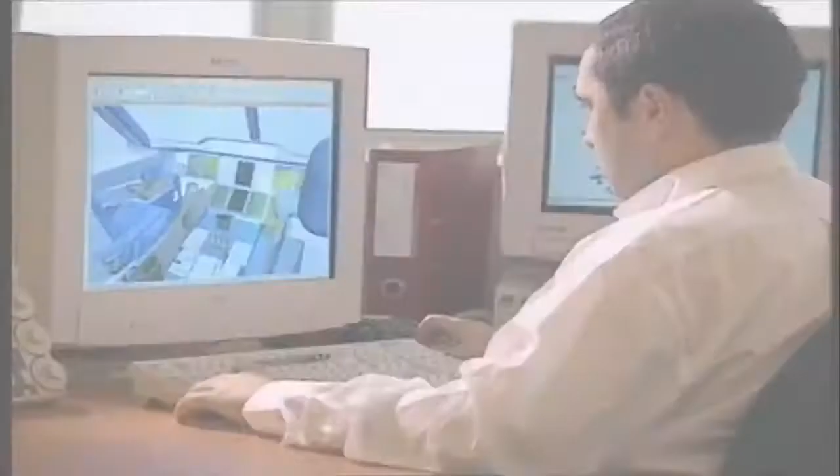It's a mega plane, bigger and heavier than any other passenger plane in the sky. It will hold more people than any commercial jet flying. Designers have spent billions. Now is the moment of truth. Will the world's biggest passenger airliner survive its maiden flight?

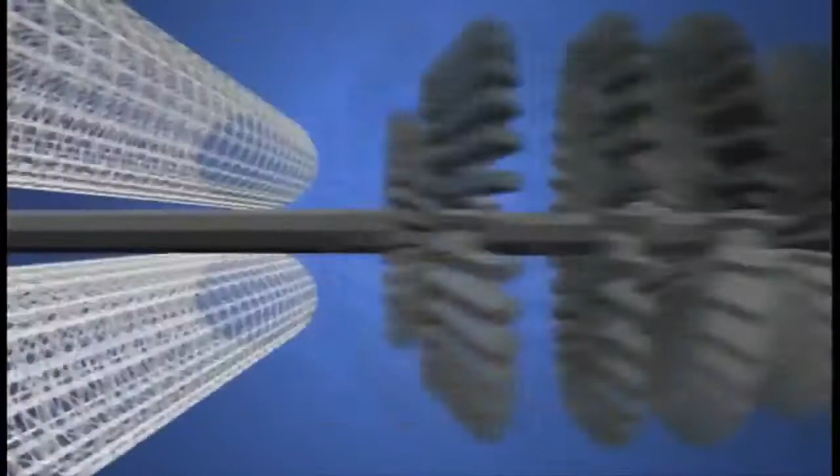An early spring morning, clear skies and a light breeze over southwestern France. Crowding the fields that flank Toulouse International Airport, 40,000 spectators, backpackers, campers and journalists from around the world. All vying for the perfect spot to watch the maiden flight of the Airbus A380, the largest passenger plane ever built.

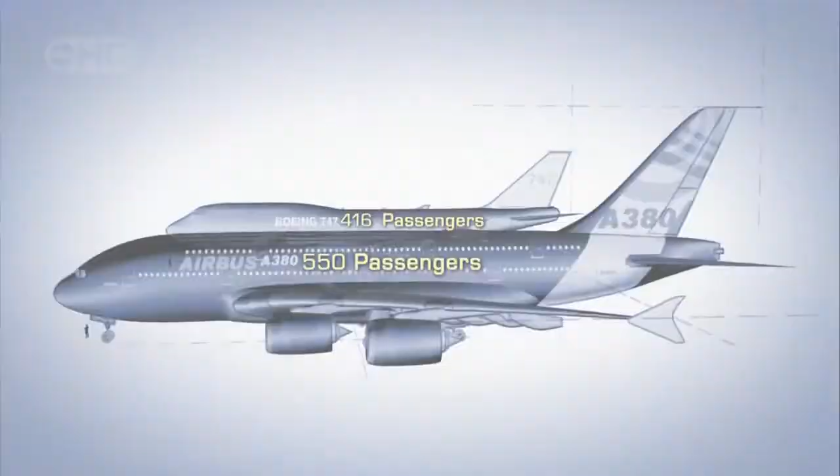It's 73 meters long, 7 stories tall at the tail, almost 80 meters from wingtip to wingtip. Heavier, longer and taller than a 747, with 2 full levels of seating, enough to hold over 550 passengers. Getting this monster off the drawing board required new, super lightweight materials, 4 powerful new mega-sized engines, massive new factories across Europe, and a computerized flight control system more sophisticated than any other in commercial aviation.

This moment is the biggest gamble that the company has ever taken. A $12 billion investment, the company's entire future, and the lives of future passengers all ride on the success of this historic test flight. Alongside the runway, a hush settles over the crowd as the megaplane comes into view. Gradually, it gathers speed, accelerating to reach its takeoff velocity of 269 kilometers per hour.

Then, as it nears the end of the runway, the moment of truth. The massive nose tilts skyward. A sliver of daylight appears beneath the rear wheels, and the Airbus A380 takes to the sky for the very first time. The engineers and technicians in the crowd breathe a collective sigh of relief. Their baby is flying.

The question now is, does anyone want a plane this big? Will the unprecedented size prove a boon or a boondoggle? Is this super jumbo the future of commercial aviation? Or the biggest white elephant since Howard Hughes built the Spruce Goose? It all depends on whether Airbus can convince airlines that travelers will want to trust their fates to this flying cruise ship.

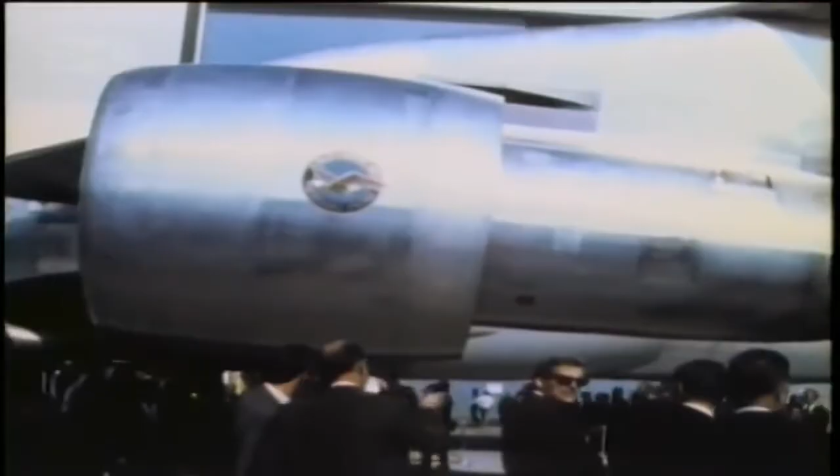1969 was a year of technology firsts. That year saw the arrival of 2 exotic new airliners. Boeing rolled out the 747, the first double-decker passenger plane, larger and heavier than any other. Powered by 4 Pratt & Whitney JT9D engines, providing a total of 186,000 pounds of thrust, the plane had enough oomph to carry more than 400 passengers and their baggage, more than double the capacity of the 707. The plane wasn't an immediate hit. But eventually, it took off.

The Concorde is here. That same year, Aerospatiale and British Aircraft Corporation, the precursor to Airbus, introduced the Concorde. While Boeing was bulking up, Europeans were getting small, but very fast. The Concorde traded capacity for speed. The plane carried only 128 passengers, but it could cruise at twice the speed of sound, cutting the trip from New York to London from almost 8 hours to just under 3.5. Both the 747 and the Concorde came to be the epitome of luxury in air travel.

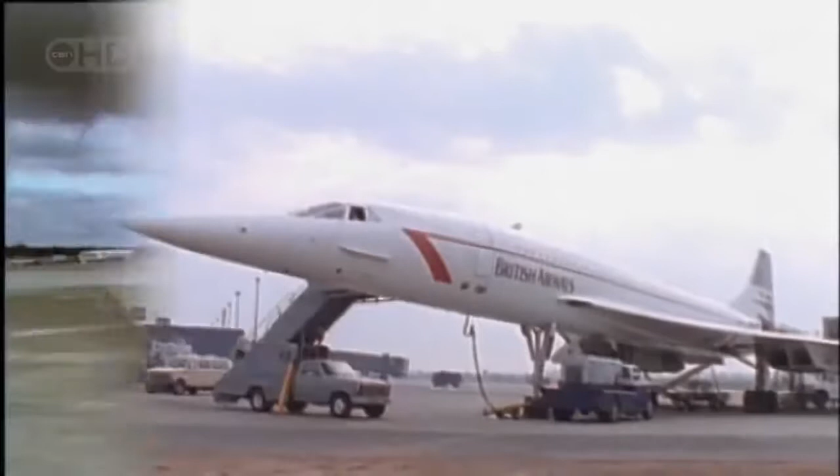These two differing visions came to symbolize a fierce rivalry between American and European aerospace giants. A rivalry that's only intensified with time, even as the business of air travel has changed dramatically. The Concorde, after years of financial difficulties and a devastating crash in Paris, has been grounded. And the 747 is now an aging workhorse, noted less for style and more for the sheer number of passengers it can pack between its wings. What changed to turn air travel from a luxury to the airborne bus ride that it is today?

Simple economics. In just a few short decades, the number of people traveling by air has tripled. Now, every day, hundreds of thousands of people pack into 70,000 flights, taking off and landing at more than 4,000 airports around the world. And those numbers are only going to get bigger, much bigger. Industry analysts predict that the number of air travelers could double again by the year 2020. That is, if anyone can figure out how to squeeze them into an already overcrowded system.

Both Boeing and Airbus saw the writing on the wall in the 1990s. But the companies each took a very different bead on the problem. Boeing believed that one of the biggest increases in air travel would be point-to-point flights. Get on near your home, get off near your destination. Boeing put its muscle behind the 787 Dreamliner, a highly efficient plane designed to carry an average of only 250 people.

The A380, though, is an altogether different order of beast. It's designed for hub-to-hub travel. Passengers will board a small plane near their home, then connect at a major airport to a larger plane, travel halfway around the world, and get off at their final destination. It's a strategy specifically designed to serve the most rapidly expanding long-haul routes in and out of Asia, and to cater to customers who appreciate a bit of pampering.

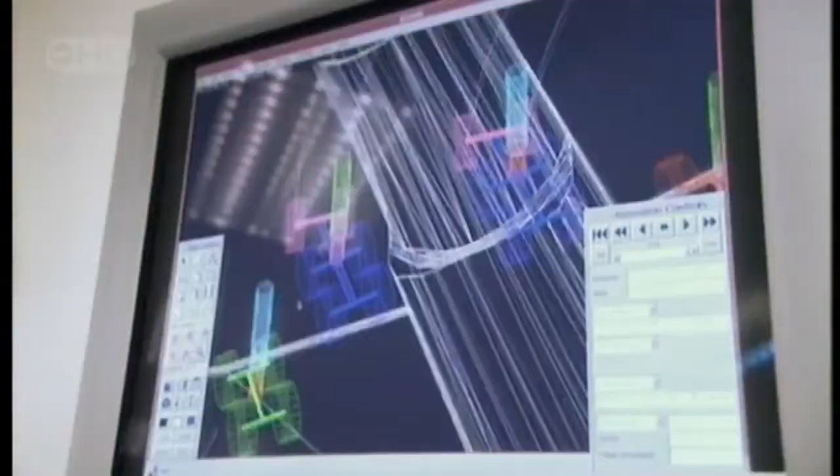The plane's sheer size, with 2 passenger decks, is large enough for both standard seating as well as more luxurious features, like a lounge, a high-end shop, 2 staircases, even a waterfall. It's a breathtaking dream. But no one knew if such a plane could be built. Some argued that such a craft would be far too heavy and expensive to be practical. But a tenacious and aptly named Airbus executive, Charles Champion, wouldn't take no for an answer.

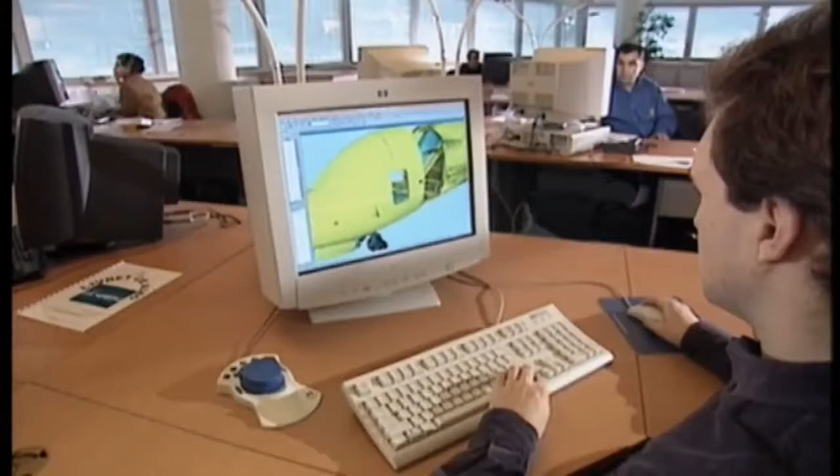He encouraged his design team to think outside the box. Yeah, well, there were lots of weird designs. Some looked at the double bubble. One of their first ideas, the double bubble, a double-wide fuselage. It looked promising, but computer analysis showed that it would be far too heavy and not sufficiently aerodynamic. So Champion sent his team back to the drawing board, and eventually they came up with this history-making concept.

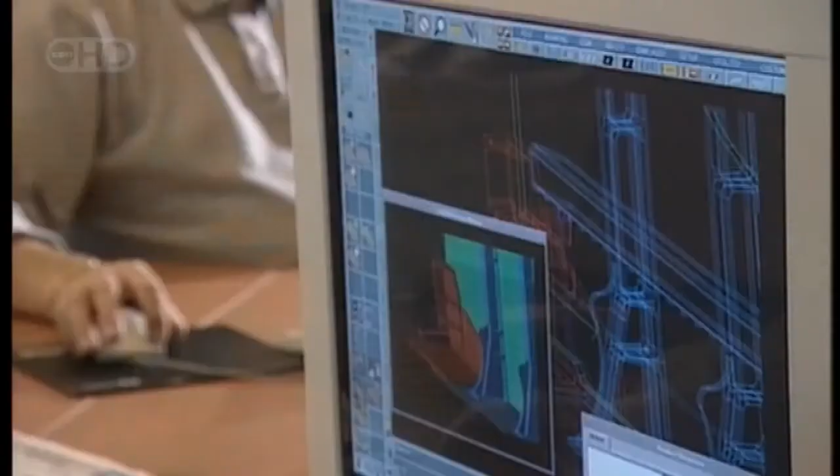A full-length, double-decker passenger cabin, with a 3rd deck below for cargo. Space-wise, it's the equivalent of 2 complete wide-body cabins, one on top of the other. The new plan called for an aircraft only 2.5 meters longer than Boeing's 747. It was 15 meters wider and 5 meters taller. But when they ran the design figures through the computer, they had a shock. The plane was far too heavy.

And we came up with horrid figures, saying, my God, this is the weight of the aircraft, doesn't work. So what we did immediately at the launch of the program, or 2-3 months afterwards, we launched a very strong challenge on the weight. The team set out to bring the base weight of the aircraft below 277 tons. That's only about 50% heavier than the 747. An ambitious goal for a plane designed to carry over 100 more passengers and their luggage halfway around the world. Unless Champion and his engineers could find the means to beat that target, the dream would die.

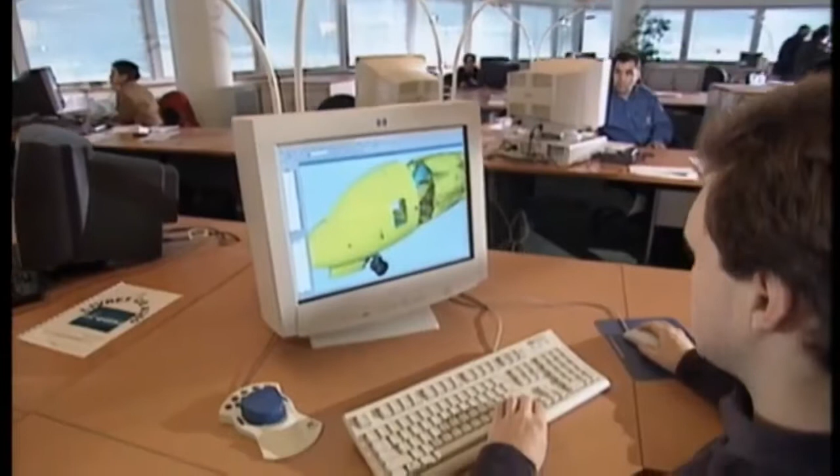Airbus engineers were faced with a design challenge that called for a lightweight plane carrying over 550 passengers at a lower cost per seat, not to mention quieter and less polluting than anything in the air. The design team knew they would have to rethink everything. They needed lighter materials, more powerful engines, larger wings, even bigger and smarter factories. Every component would have to be scaled up from supersize to mega size.

But even while the engineers were still scratching their heads over the details, the Airbus sales force was already hard at work, seducing customers with visions of the future. They created a full-sized interior mock-up that promised passengers in coach some relief from the grind of travel. With seats an inch wider than in other planes, and overhead bins 10% larger.

Each plane can also feature a new interior illumination scheme to eliminate the upsetting effect created when flight attendants suddenly switch on overhead lights. The kinder, gentler system in the A380 mimics the gradual transition from day to night and back to daytime again. These and other innovations make the plane distinctive, but it's the promise of opulent luxury that really turns heads. To help build excitement, computer programmers constructed a virtual showroom where airlines can bring to life their wildest design fantasies.

Ladies and gentlemen, this is your captain speaking. I'd like to welcome you on board this 3D tutorial for the A380 main deck door.

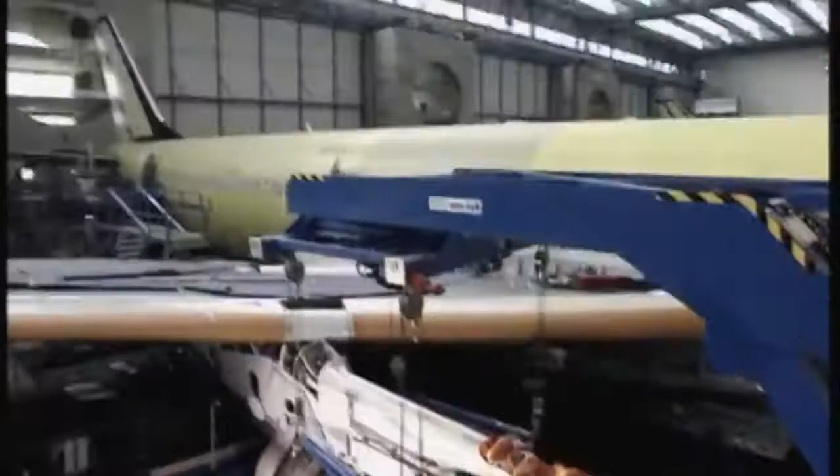Of course, no dream could take flight until engineers came up with a way to lift all that weight. In late 2000, builders finally settled on a design. For power, they would buy engines built by Rolls-Royce, capable of providing 30% more thrust than the engines used on the 747. Each massive power plant cost $15 million, as much as a ton of gold. Altogether, they account for almost 25% of the cost of the entire plane.

If there's one thing this aircraft needs, it's thrust that won't quit. Each engine provides up to 80,000 pounds of force. Running at top speed, this mega guzzler sucks down a litre of fuel every second. The A380 is designed for routine flights lasting 13 hours or more. That means when it's fully tanked for takeoff, the A380 carries a lot of fuel. 260,000 litres, 20% more than the load carried by the 747.

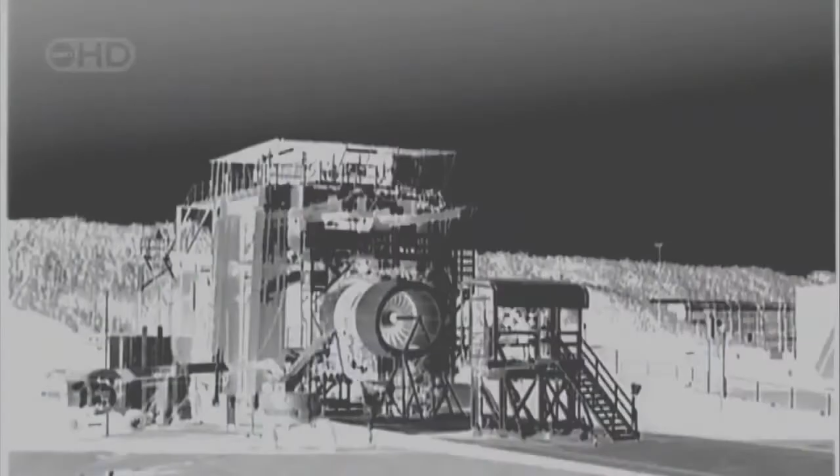Just imagine what would happen if anything threatened the integrity of one of those fuel tanks, like a catastrophic engine failure that sends shards of metal tearing through them. That's the nightmare that haunts engineers at Rolls-Royce, and they're about to destroy an engine to make sure it never occurs.

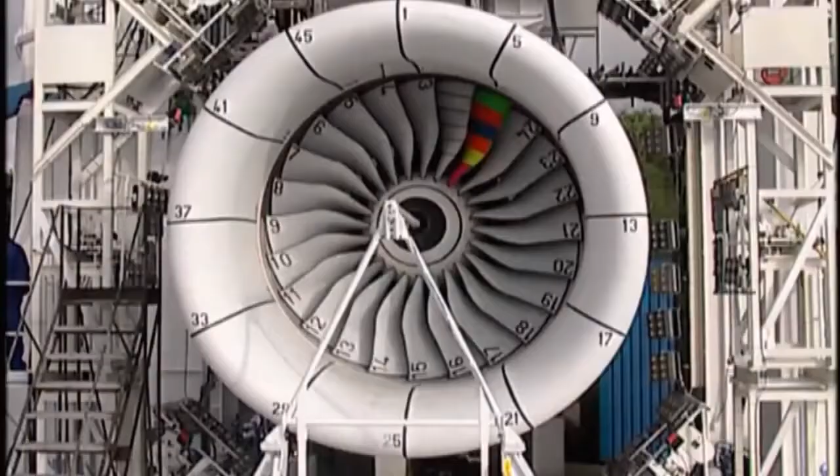These 24 titanium fan blades suck air into the maw of this A380 engine. Each blade is 1 meter in length and weighs 15 kilograms. Lightweight, but super strong. When the engine is roaring along at full throttle, the blades spin at almost 3,000 revolutions per minute. The centrifugal force at the tip of each blade is equivalent to the weight of a 110-ton locomotive. If one of these were to break off and escape into the engine, it could wreak unimaginable destruction to the plane.

That's why Rolls-Royce engineers are about to conduct an engine failure test. They're going to intentionally cause one of the fan blades to break off at full speed in order to prove that the engine enclosure can contain the damage without letting any metallic fragments escape. In the process, they will totally trash this $15 million engineering marvel, a small price to pay when the lives of over 550 people could be at stake.

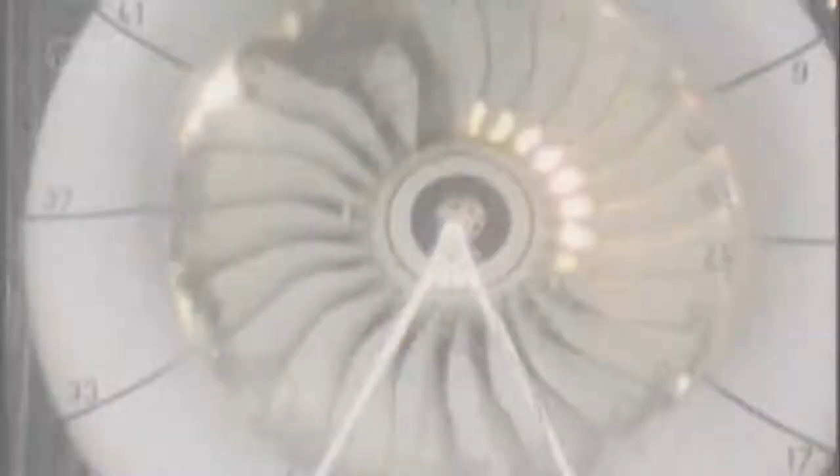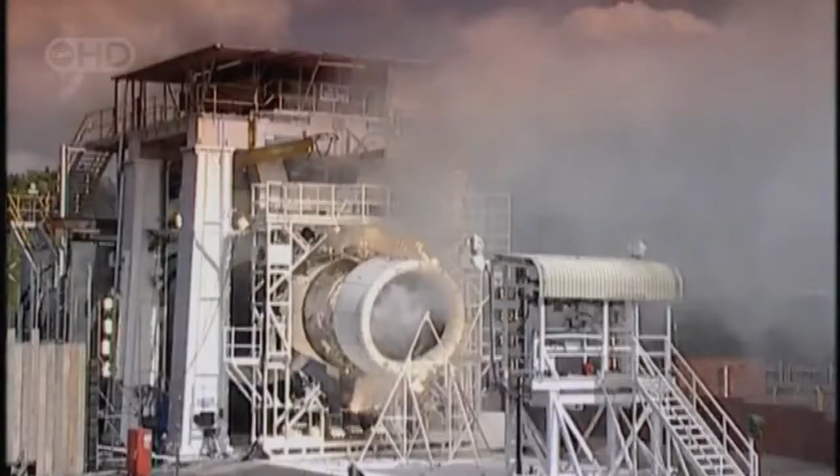A super slow-motion camera captures every moment in excruciating detail. The blades are striped to make visual measurement easier. When the fan is spinning at full speed, engineers send a signal to explosive bolts at the base of the multicolored test blade. Faster than even this camera can see, the knife-like piece of metal shears off and flies into the engine mechanism, wreaking havoc, but no fragments escape. The A380 engines are safe for flight, but there are many more pieces to the puzzle. Every other major component would have to be designed from the ground up.

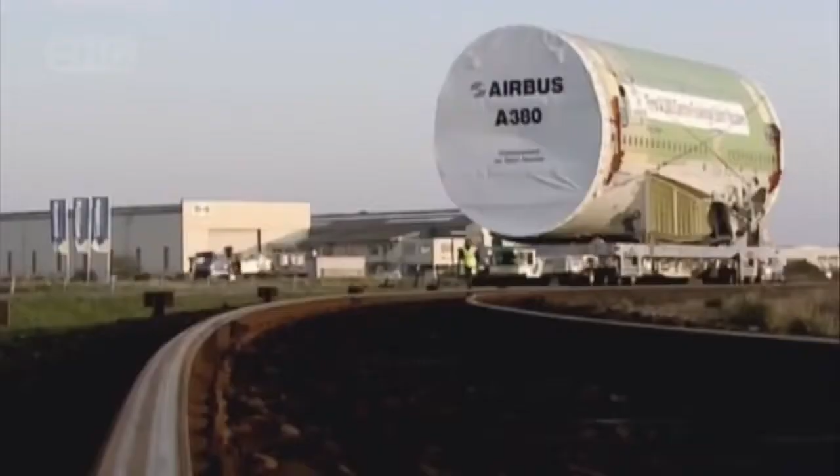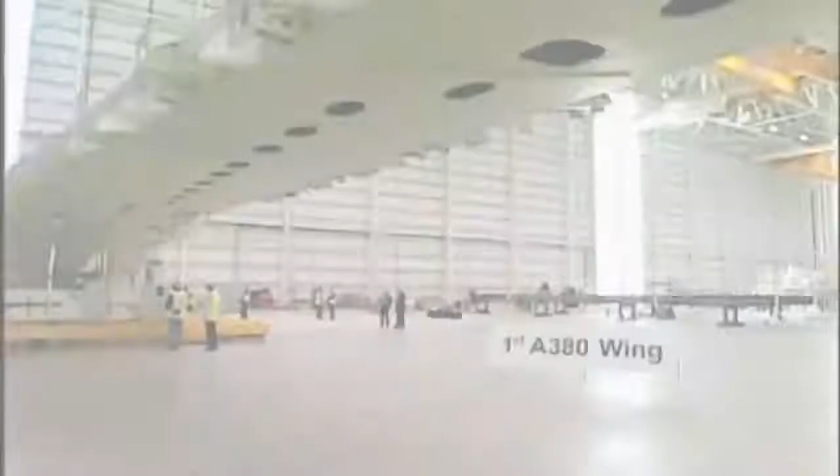Luckily, Airbus has already turned the world into a giant mega factory. With 1,500 suppliers and facilities used to build its existing planes, scattered over 30 countries, yet tightly linked by an advanced communication and transportation network. To assemble the hundreds of A380s the company hopes to sell in the coming decades, planners settled on 5 countries to build the major components. Wings in Wales, engines in England, the fuselage and vertical tail section in Germany, the horizontal tail section in Spain, and of course France, where all the pieces came together to assemble the finished plane.

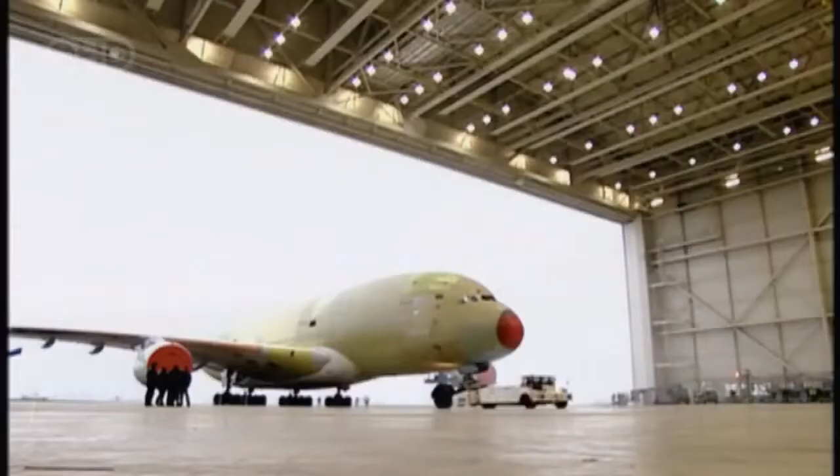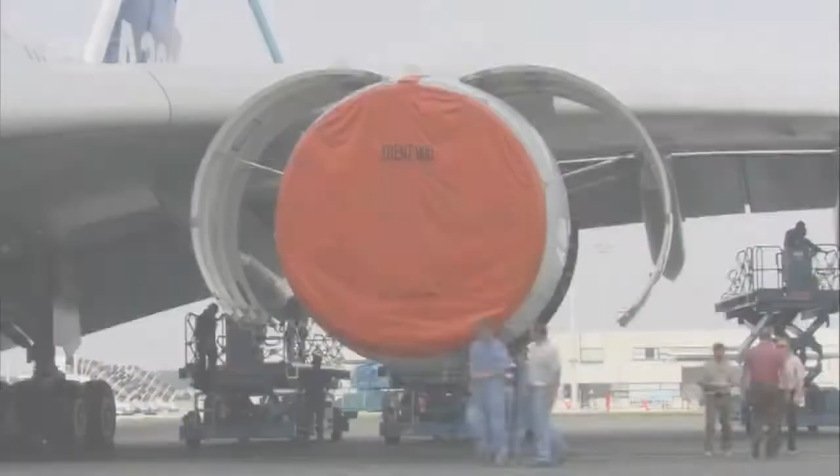The process begins in Wales, in 2 huge new wing factories, built to assemble the largest and most structurally complex commercial airplane wings ever designed. 32,000 components, shipped in from every continent except Antarctica. The wings on the A380 are true mechanical marvels. They provide flight control and enough lift to carry the fuselage, plus the 4 supercharged engines, each weighing nearly 6.5 tons. And with 260,000 liters of fuel loaded inside 10 interior locations, the wings are also flying fuel tanks. They're one of the most critical structural components in the entire aircraft.

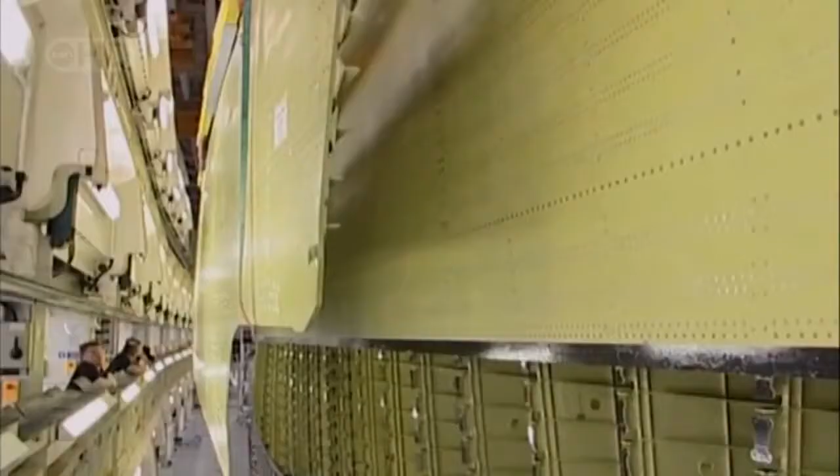The precision construction process begins with sheets of aluminium. Destined to be shaped into the 10 panels that cover each wing, each piece has its own shape and weight requirements. To whip one up, just follow 3 not-so-easy steps. Shave it, wrap it, then bake it.

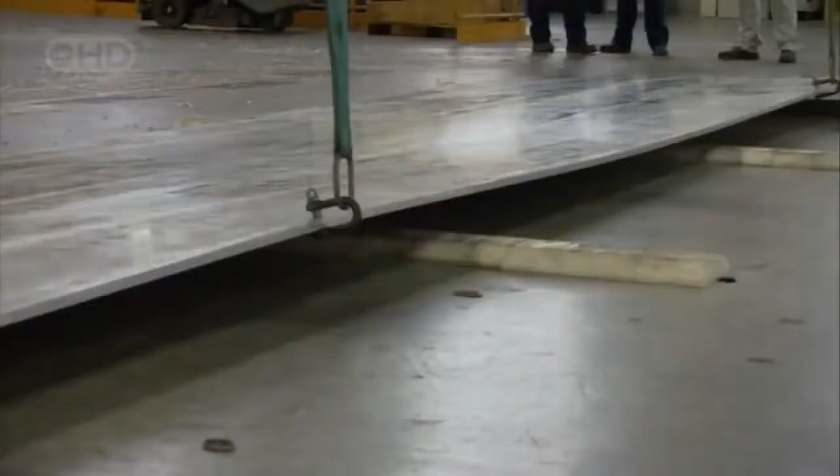This 34-meter-long slab of aluminium weighs in at 5 tons. Way too heavy for the wing panel it's destined to become. In its final form, it will weigh close to 1 ton. So off it goes, to get the aerospace version of a tummy tuck. Overhead cranes use 32 powerful suction nozzles to lift and transport each aluminium slab.

Tim Fernifer carries the burden of responsibility. Using a remote-controlled steering device, Tim guides the 5-ton piece of metal across the factory floor, but he can't do it alone. His team must watch the motion of the wing panel throughout the ride.

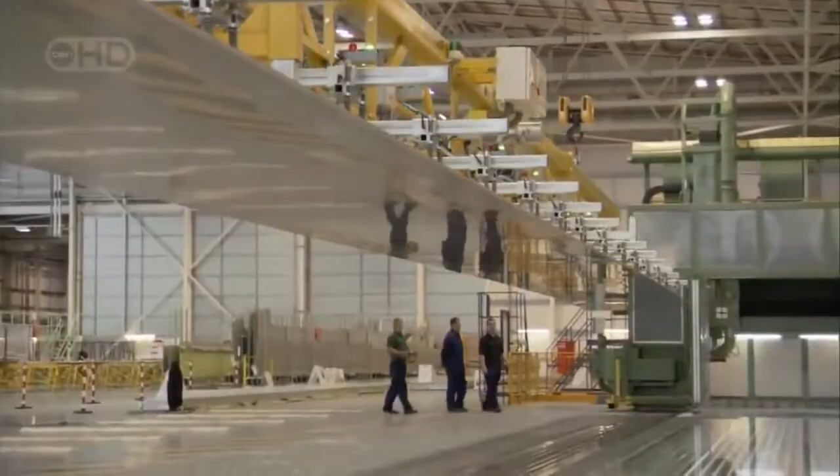You've got to be particularly careful when I'm handling it. But I can't see down the other end, so I need another pair of eyes down the other end. It's just health and safety issues. You have to watch, make sure everybody's out of the way when it's actually moving. It's a dicey ride across the factory floor before the huge sheet can settle safely into position.

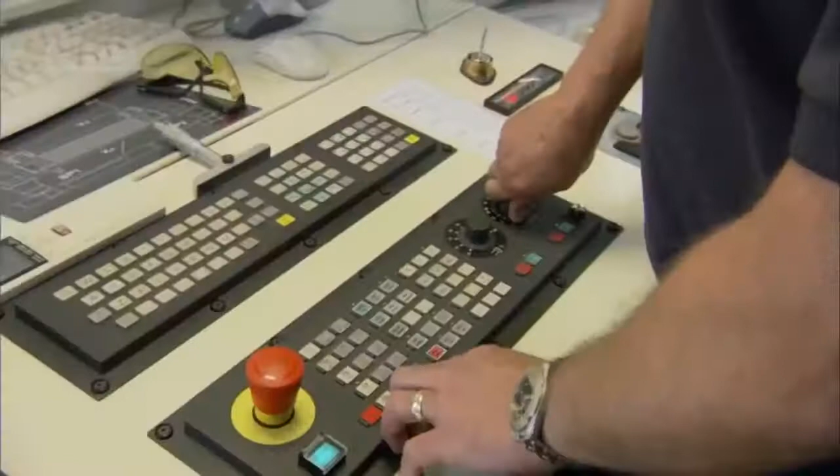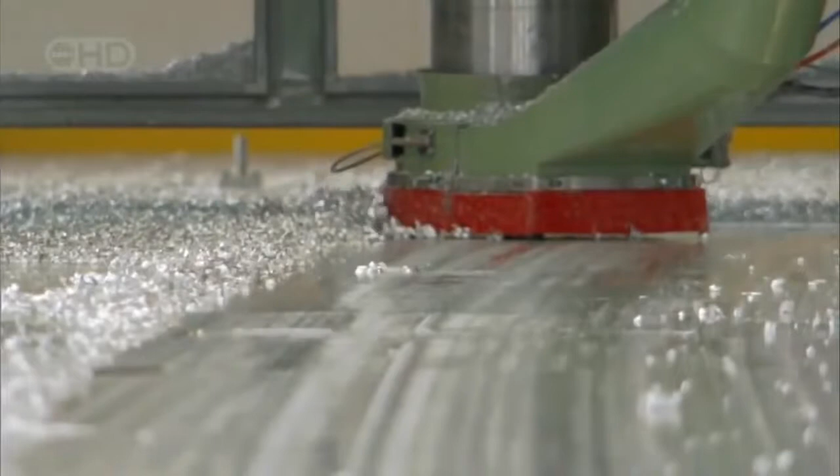A milling machine 40 meters long. Like an oversized cheese grater, the precision cutting head slowly cuts back and forth across the surface of the wing, painstakingly shaving the aluminium until the panel shape matches the 3D contour map stored in the machine's computer. The process takes up to 3 days. It eliminates 75% of the panel's weight while maintaining its strength.

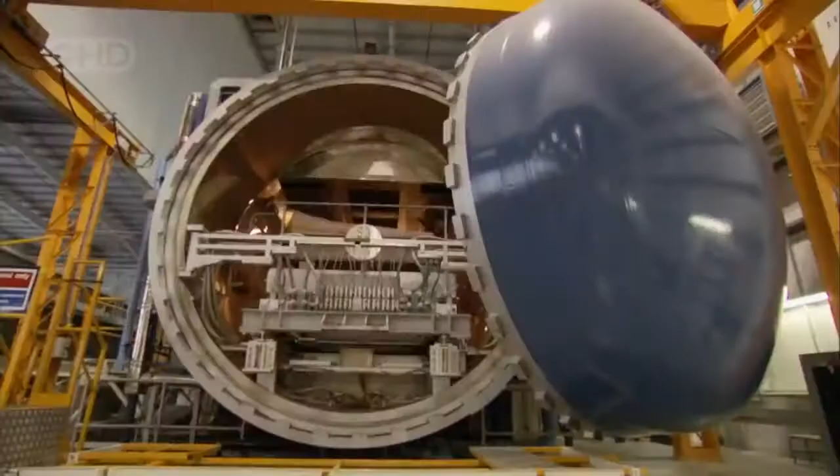Then it's ready for the oven, one of the world's largest pressurized heat chambers, 42 meters long, almost 6 meters wide. Technician John Massey has cooked plenty of wings for smaller Airbus planes. It's a challenge to see it go from the size of the 320 to the size of the 380. It's a huge, huge jump. The A380 wings are 50% larger than A320 wings. That means a 50% greater chance of error in this critical process.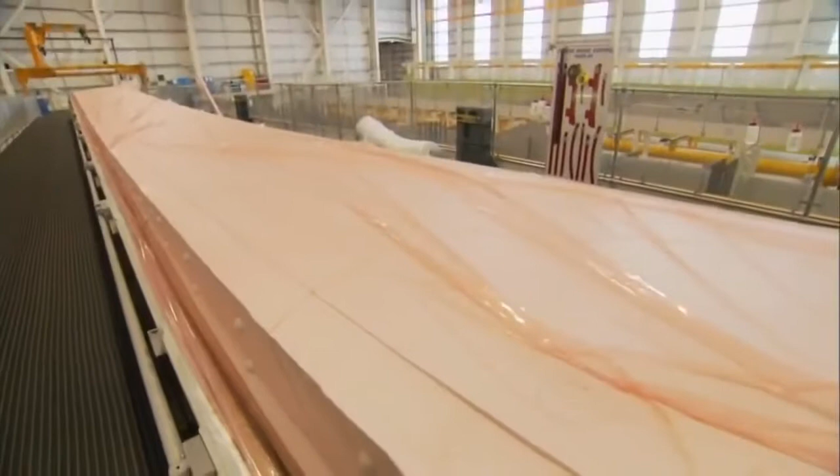Baking requires careful setup. First, Massey and others place the segment in a special metallic form. Then they vacuum seal the entire assembly with a massive piece of plastic shrink wrap to protect the metal from contamination. Inside, the heat must be uniform across the entire panel, 150 degrees centigrade, with no room for error.

We try to avoid any changes in the vacuum or the temperature, so the temperature must remain constant right throughout the process. It must maintain within 3 degrees. Otherwise the run is invalidated. After 24 hours, the panel is ready.

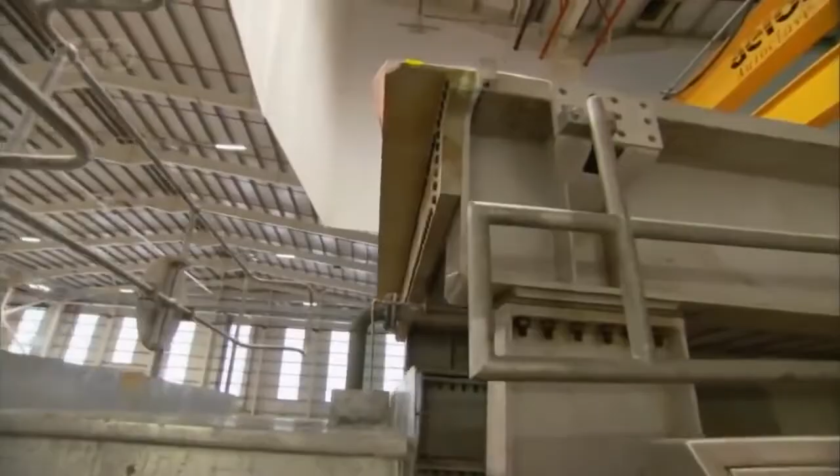Specially equipped vehicles rise up and move into place in front of the oven. All eyes are on the plastic protecting the wing panel. If it breaks, the aluminium wing piece is compromised. A disaster. The entire wing panel would be worthless. If the bag bursts, it means starting the job again from scratch. Anxiously, they scan the surface for any breach. At last, the wing is cool enough to touch. And good news, the bag appears to be intact.

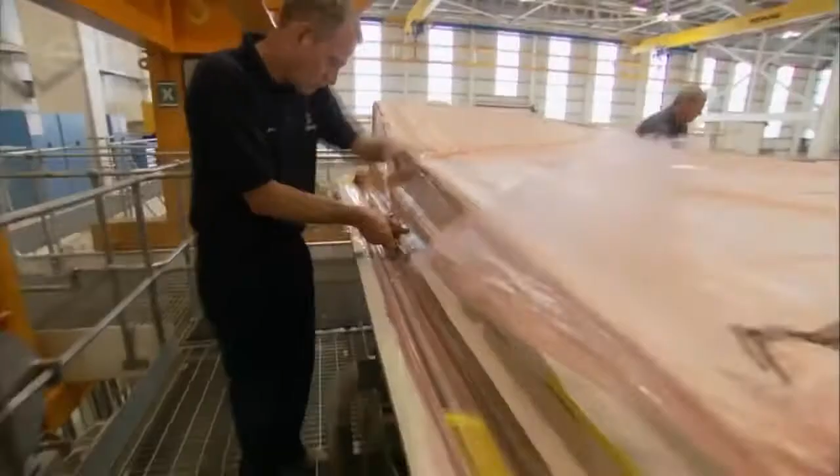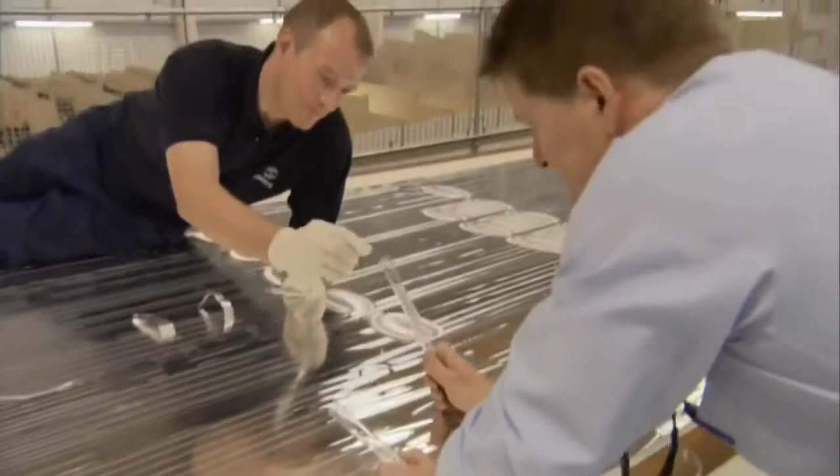Finally, the wing segment arrives in its docking bay. Here, the technicians first remove the plastic and cloth wrap. Now begins the tedious search for flaws. John's boss, Gareth Williams, arrives to inspect the piece. He retrieves small metal rods that were baked onto the top of the wing panel. Each of these cylinders tells an important story about future safety.

These are test pieces which are made of the same material as the wing panel, and we use them to confirm that the heat process that this part's just gone through is correct and it's to the right specification. When this testing phase is complete, Gareth and John get the okay to move the wing to its next destination.

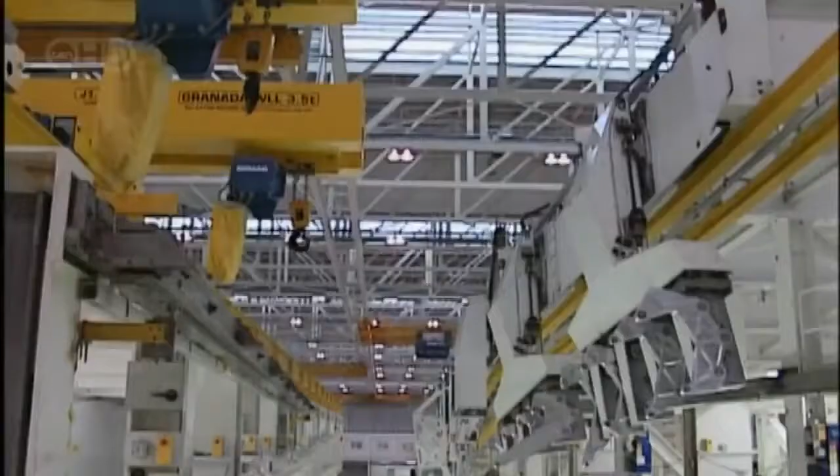The nearby wing assembly plant, an enormous brand new factory located just up the road. It's one of Britain's largest industrial buildings built in this century. It's nearly 85,000 square meters in area, equal to 12 full-size football pitches. This is where the builders attach the aluminium skin panels to the wing skeleton. George Lee guides his team through the tricky assembly process.

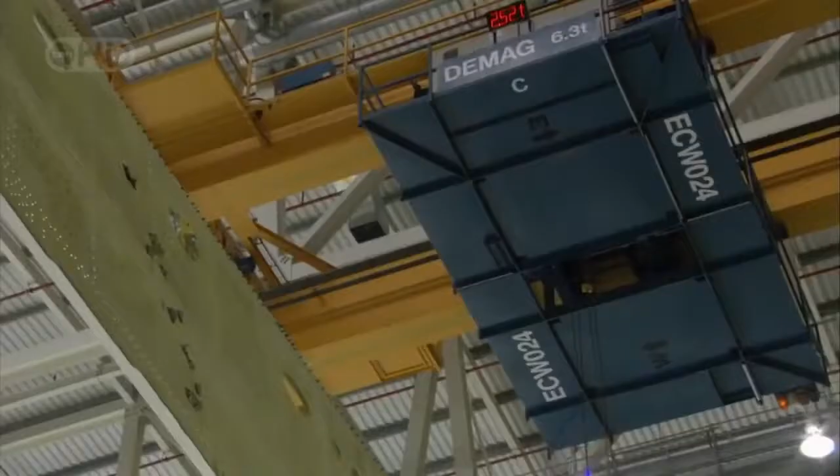Today they're preparing to lift and place one of the largest of the 20 aluminium panels, 34 meters long and weighing in at more than 1 ton. Size is a great challenge because everything requires some form of overhead lifting. Nothing can be lifted manually, so virtually everything requires overhead craneage movement, and therefore the management of the craneage system is very, very important. The panel hangs like a huge guillotine, suspended over the factory floor. But that's not all that's hanging over the assembly team's head.

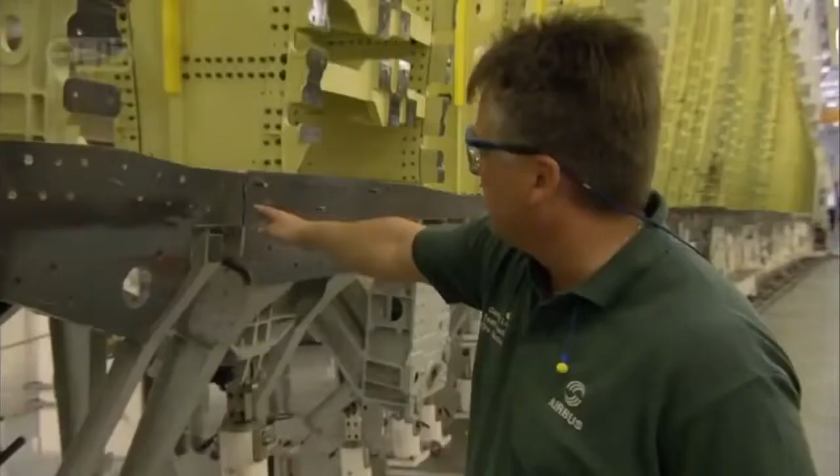Time is running out. Along the edges of the partially constructed wing, builders have applied a sealant that'll help to ensure the integrity of the fuel tanks. The sealant dries quickly within hours. The team must fit the wing panel into place before the sealant dries, or the wing could be defective. This time they're cutting it close. The only concern I've got is the time factor. If they don't succeed, the team will have to scour the sealant off the aluminium surface and start the whole process again.

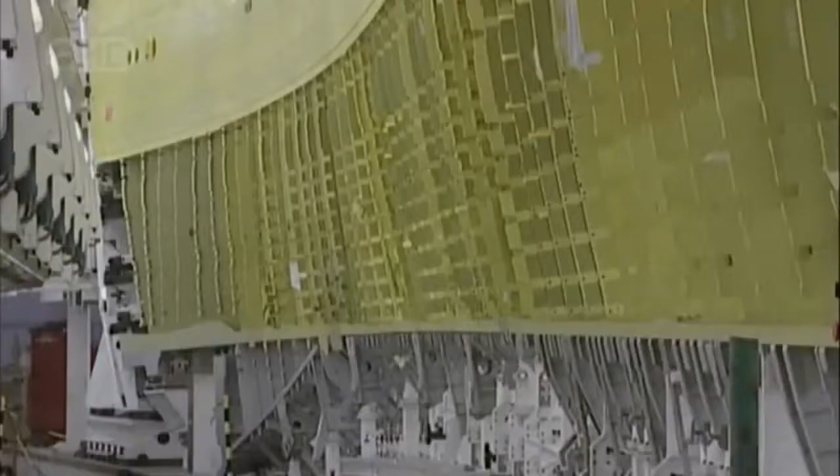Finally, the panel settles into place. 1 down, 9 to go. It can be stressful, yeah, it can be stressful. At certain times, it's an enjoyable job, because when it actually all works and goes together, it's quite enjoyable. You've made it an achievement.

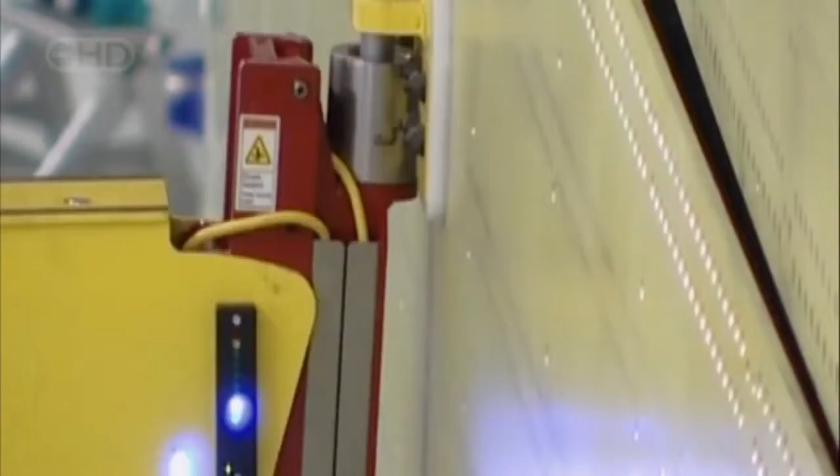Now it's time to glue and bolt together the pieces, like building the world's biggest model airplane wing. This part of the process remains a carefully guarded trade secret. The company wants our cameras off. No cameras.

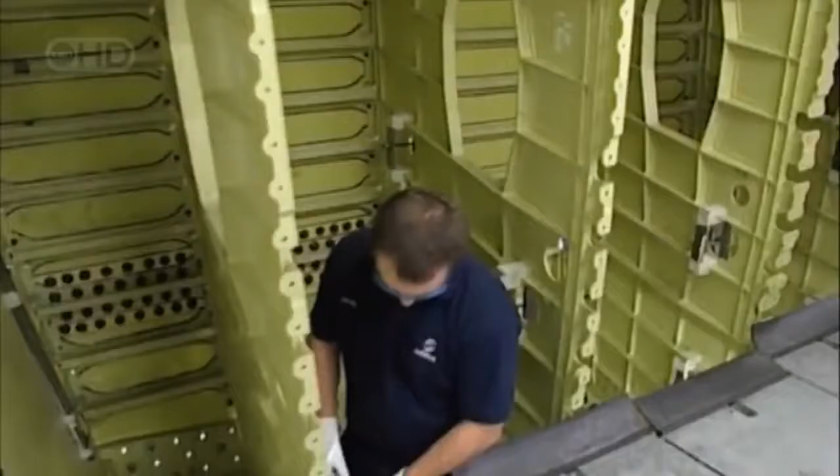The secret assembly process inside the jig will take nearly 4 weeks to complete, but it takes more than a wing to make a plane. All across Europe, more factories are coming online, pumping out body parts of this giant Franken plane. But not everyone is happy to see this kind of progress. Some locals in Germany are up in arms over Airbus's ambitious plans.

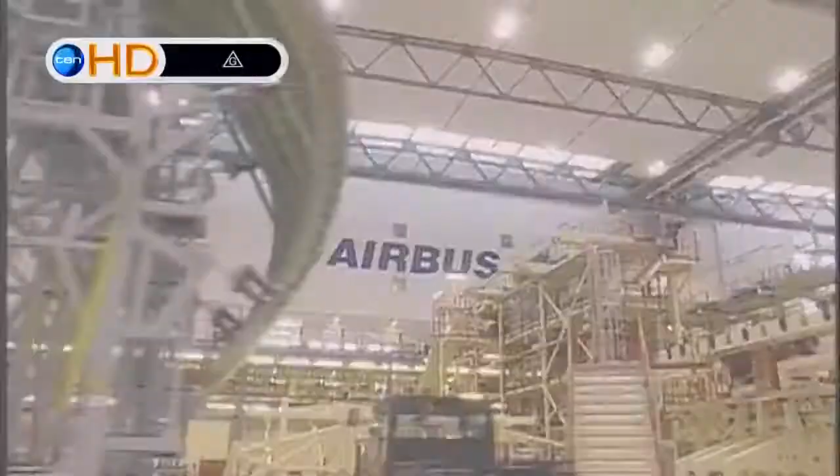This is the newest Airbus factory in Hamburg, a megastructure big enough to house 4 A380s side by side. Airbus has been building airplane fuselages in Germany for more than 30 years. But with the announcement of the A380, the company needed to massively expand the site and send finished planes here to get tricked out on the inside and painted on the outside.

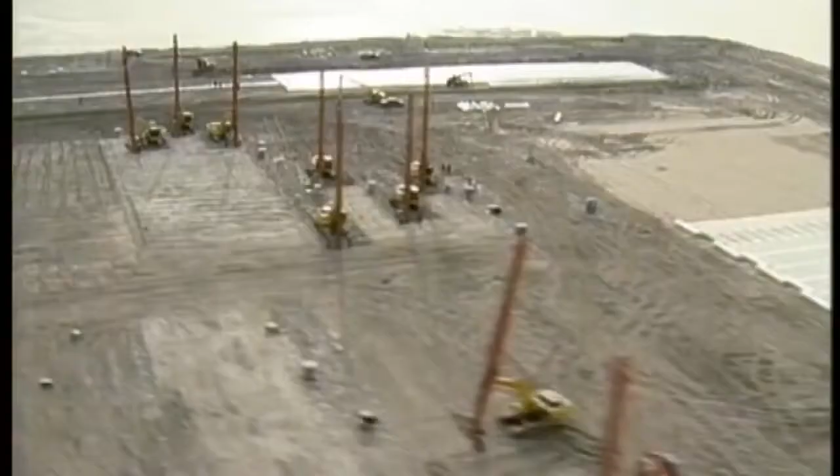No matter what the customer wants their plane to be, a 550-seat cattle car, a high-class hotel in the sky, or even a heavy-duty freighter, this is where the seats, the carpets, the stairs, and yes, even the bar and the waterfall will all be installed. The expansion plan called for 3 new buildings and a longer runway to accommodate the massive plane, but there was a problem.

Airbus's main factory here sits alongside Germany's Elbe River, smack in the middle of Europe's largest tidal wetlands. It's a very special area because we have there the influence of water from the country and tidal water from the sea. So we have a mixture of sweet water and salt water. This fragile ecosystem is home to 70 species of migratory birds. Now 71 if you count the Airbus A380.

Airbus wanted to fill in 140 hectares of pristine wetland, and local activists cried foul. A pitched battle in the courts and demonstrations in the streets delayed construction of the factories for over 2 years. But eventually, local and national politicians who wanted to bring business to the community intervened.

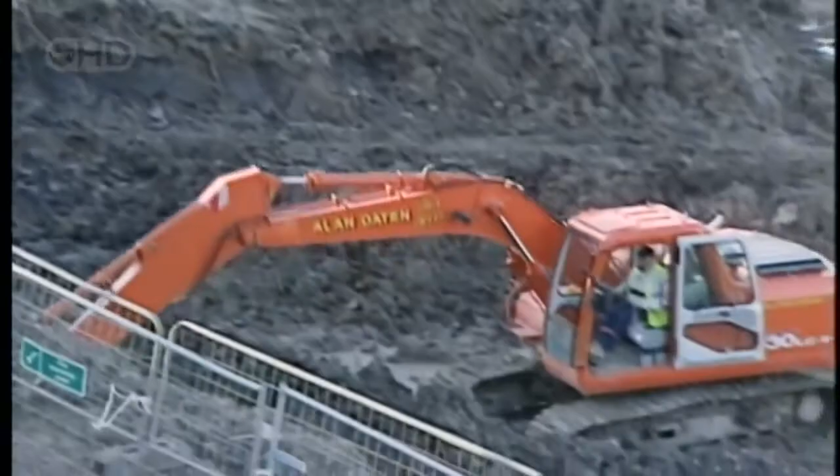The factories went up. One got busy building fuselage segments, but the other 2 stand nearly empty. More lawsuits still block the Hamburg facility from taking delivery of all of the planes it's meant to finish. Unless the company wins in court, it may have spent a few $100 million building a factory of little use. The problem lies with the runway. Airbus needs a longer runway to accommodate a heavy-duty cargo version of the A380.

We need the runway extension in Hamburg for the pilot to test the performance of the aircraft. And he only can test this when he has an aircraft with a weight which is approximately the weight you normally have in cruise altitude and a normal scheduled flight.

That plan to lengthen Hamburg's existing runway has met with considerable resistance from locals. Their concern: extending the runway will bring the tarmac to within just 450 meters of village orchards, and uncomfortably close to a Lutheran church that houses a priceless organ built in 1688. A delicate instrument that could be damaged by ground vibrations and wake vortices, turbulent bands of air similar to miniature tornadoes.

We have very precise information on the generation of these wake vortices, so small, let's say, tornadoes, wind generated by every aircraft, more or less, which can affect buildings and also persons close to the runway or close to the flight path. And we have predictions that we should expect occasionally winds up to Beaufort 12, which is about 130 kilometers per hour in the core, and these tornadoes will hit the church tower and the roof construction.

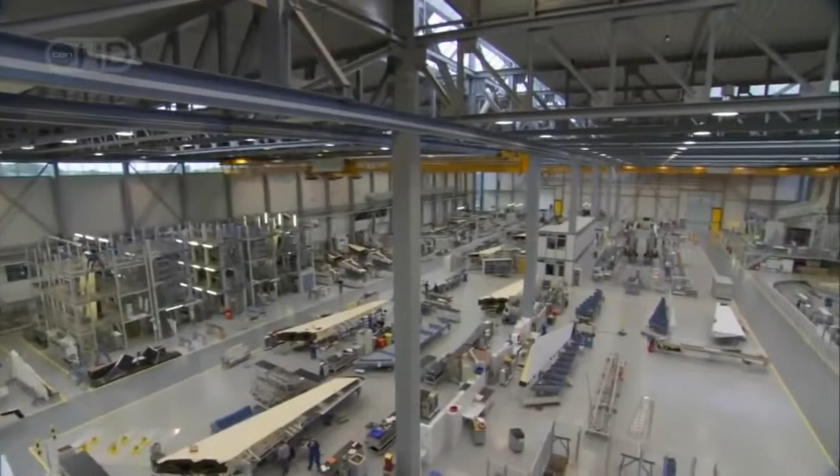Legal action by angry locals is one risk the company is vulnerable to. But just 57 kilometers away in the town of Stade, another big gamble is underway. The company is using a futuristic material to build the largest commercial aviation tail fin in the world. It's called carbon fiber reinforced plastic, and it's made out of the same stuff that gives diamonds their incredible strength. Carbon fiber is 6 times stiffer than steel and much lighter.

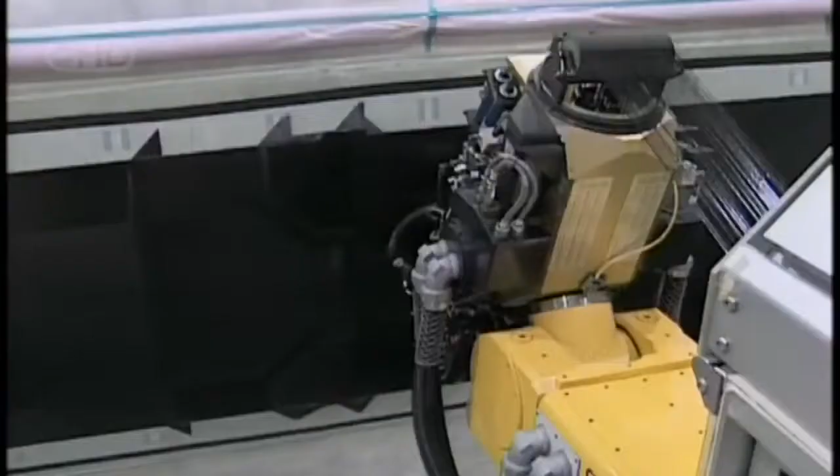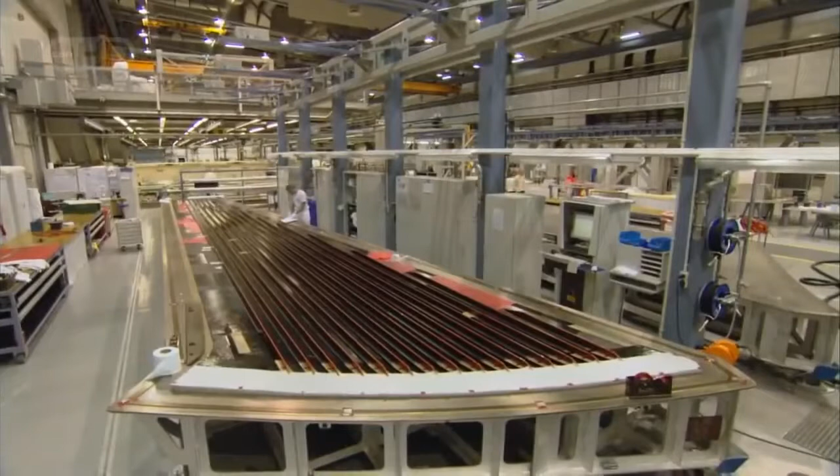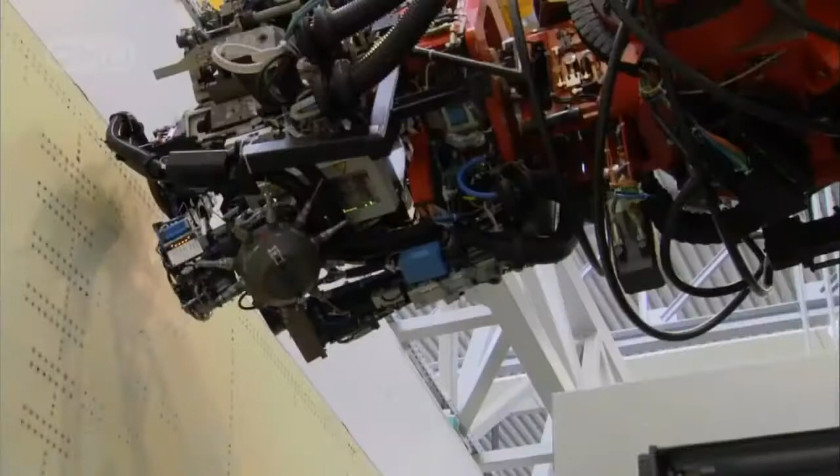It's the only option if builders are going to keep the weight of the plane below the target of 277 tons. Unlike forged metal, carbon-reinforced plastic parts are actually woven, like cloth. Fabricating machines spin out tail panels by combining super-strong carbon fibers with plastic resin to create almost any shape the designers can imagine. After baking, strengthening, painting and drying, technicians join the lightweight panels to the tail skeleton with the help of this computer-controlled riveting robot.

Working around the clock for a week, the robot makes 10,000 critical connections with tolerances no human can match. The integrity of the tail fin is crucial to the safety of passengers. Airbus engineers know only too well what can happen if a tail structure fails. In 2001, American Airlines Flight 587 left JFK Airport in New York. Less than 3 minutes later, the Airbus aircraft had crashed in Rockaway, a neighborhood in Queens, New York.

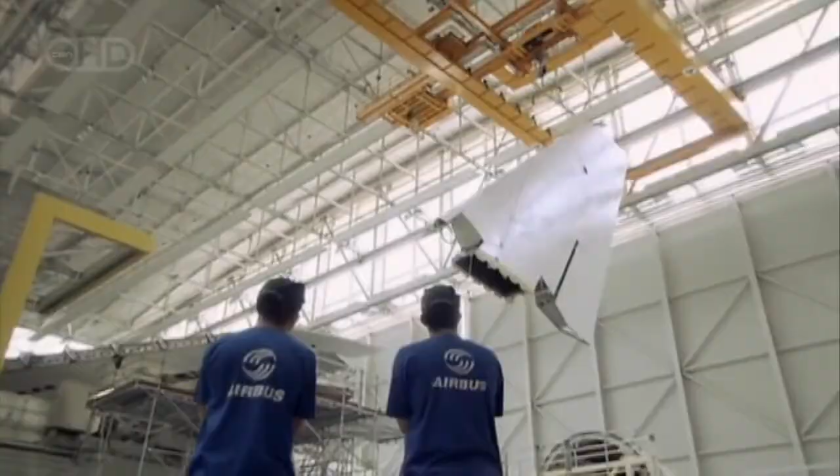It was the second deadliest crash in US history, and investigators made a disturbing discovery. It had been caused when the tail fin and rudder, made partly out of composite materials, sheared off as the plane accelerated. Investigators concluded that cockpit errors, not a failure of the carbon composite material, most likely caused the crash. And builders have applied the lessons of that catastrophe to the tail fin of the A380.

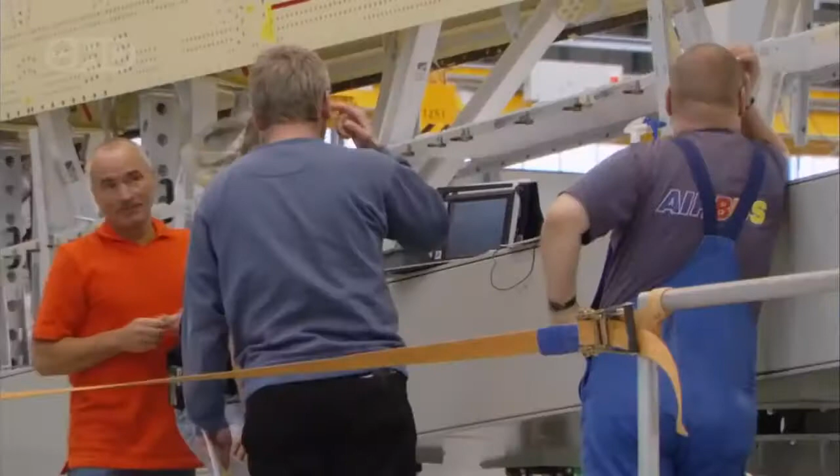But today, something's gone wrong on the factory floor. A lightning strike zapped the power supply, and now the precision riveting robot is dead in the water. We had a storm, a lightning strike. The PC failed and the hard disk was completely gone. Mother Nature has thrown a wrench into the works, causing a total crash of the system. It is electricity. Sometimes it happens. Normally we are protected, but it can just happen.

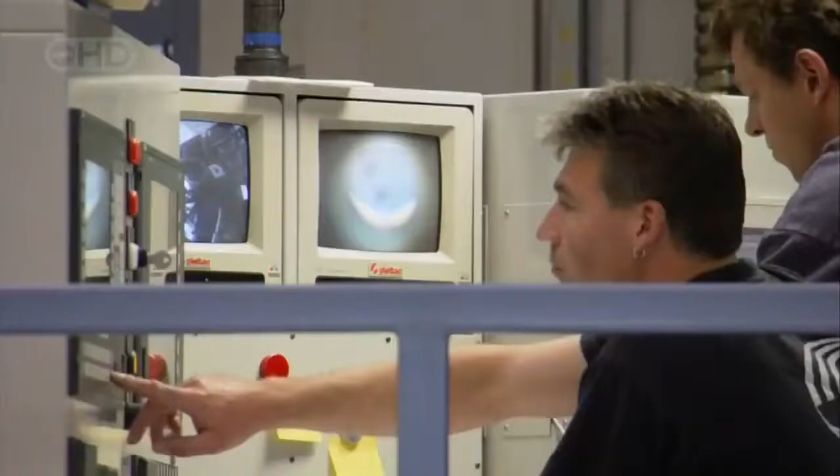Critical hours pass as Kai Baumgartner and his colleagues struggle to get the robot back online. If they can't fix the computer, they can't make the deadline set for finishing this tail fin. Kai and his team must find the problem, and quickly. By the end of the shift, the sound of riveting echoes through the factory once again. Kai is finally back at work, personally verifying that every one of the 10,000 connections is perfect. A tiny camera positioned on the end of the riveting machine allows Kai to carefully examine each rivet, making sure to catch any abnormalities in the process.

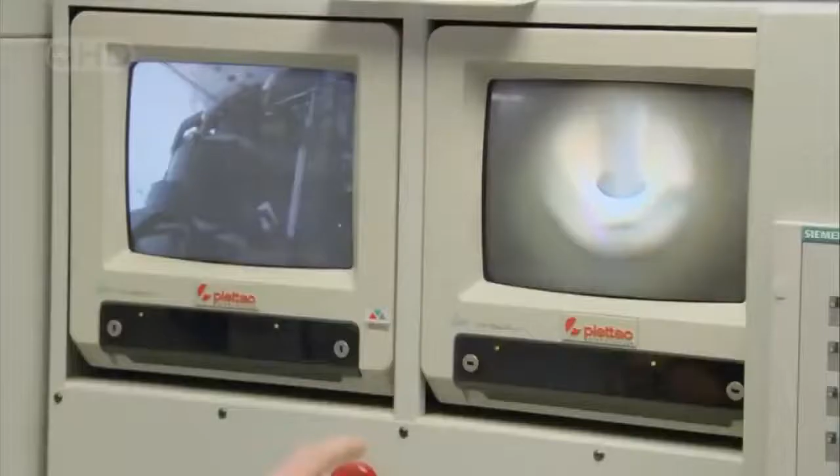I make sure that the drill doesn't get stuck or any mistakes happen. I have my different systems here. It can happen that something is stuck or that an error occurs. It's a repetitive process, but Kai must remain vigilant to safeguard the lives of future passengers. Around the world, manufacturers and suppliers are putting the finishing touches on the components of the A380.

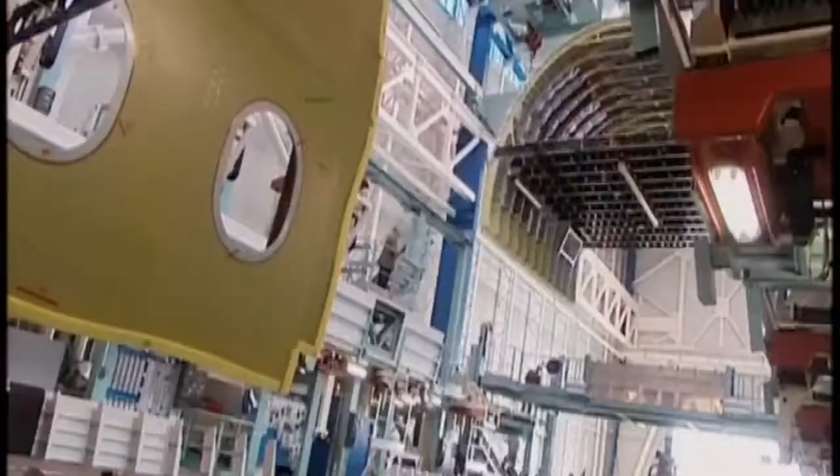But putting all the pieces together will be a logistical nightmare. Airbus's existing transport system, the custom-built mega freighter called the Beluga, is too small to haul the A380 components to the assembly factory in Toulouse, France. So builders came up with a risky plan to haul millions of dollars of critical components by water and land.

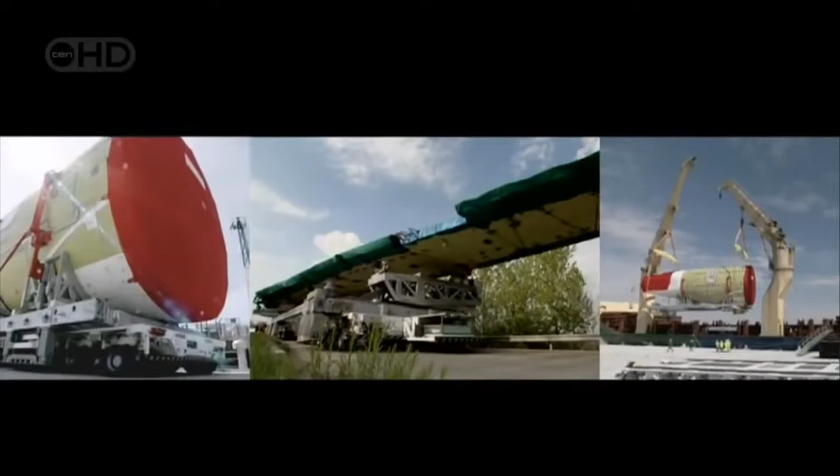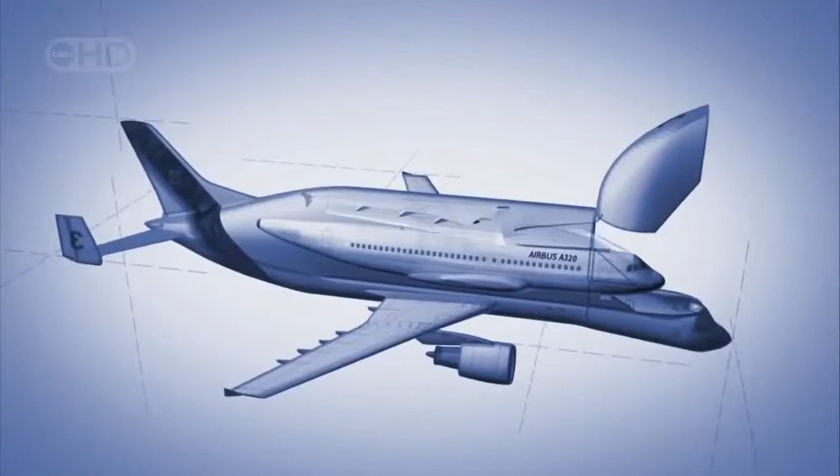Airbus had a problem. They needed to move pieces for the largest passenger plane in the world from factories all over Europe to their final assembly plant in Toulouse, France. For smaller planes, they could use the Beluga, Airbus's distinctive custom-built transport plane. The Beluga's cargo hold measures 7 meters high, 7 meters wide, and 38 meters long. Big enough to swallow the fuselage, wings, and tail sections of Airbus passenger planes like the 150-seat A320.

But when Airbus decided to build the massive A380, the sheer size of the parts overwhelmed even the Beluga. The Beluga is far too small to carry the A380's enormous double-decker fuselage or its record-breaking wings. So to get their parts to the assembly plants, the company now had to move them by sea and over land, instead of a 2-hour ride in the belly of the Beluga. Parts for the A380 joined a days-long parade of specially outfitted ocean ships, river barges, and trucks.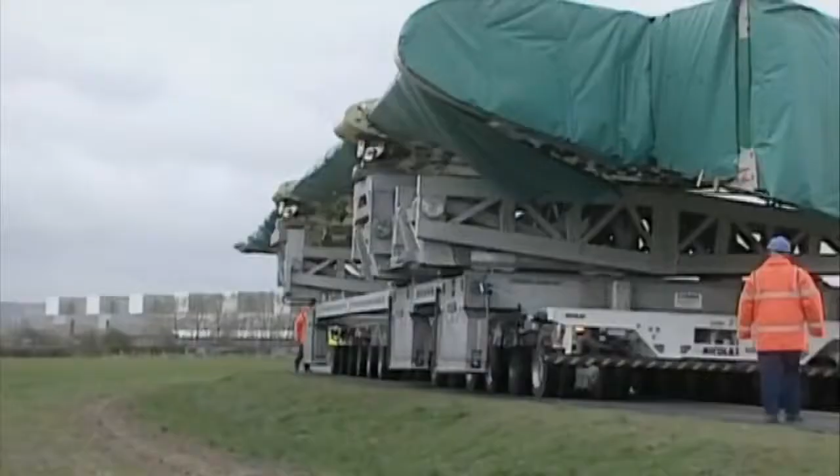Keeping this massive system on schedule is the job of Surface Transport Coordinator Philippe Nedelec, who has to keep it all moving fast. I like to say that I am a kind of conductor. I have to impose the tempo to everybody. Wings and fuselage arrive by sea in the port city of Pauillac in Bordeaux. From there, it's 96 kilometers by barge up the Garonne River.

It's a tricky bit of navigation to clear the historic Pont de Pierre Bridge, a prized landmark built by Napoleon almost 200 years ago. We have to cross a very old bridge. And at the beginning, the Bordeaux people were very afraid. What are these Airbus people going to do with our nice bridge? To maneuver beneath the Pont de Pierre, Philippe and his team keep careful track of the tides and the weather. If they don't time their trip just right, if the water is too high or the currents too strong, they could collide with the bridge, destroying precious cargo and damaging a priceless piece of history as well.

But waiting for the perfect moment isn't always an option. Suppose we miss a call for weather conditions or some other things, then the boat can miss a tide, so we can miss 6 hours. And with these 6 hours you can miss 1 week, because we cannot start the road convoy every day. It's not so easy. We cannot start when you want. Every pass under the bridge is a potential disaster. This time, they make it through, but just barely.

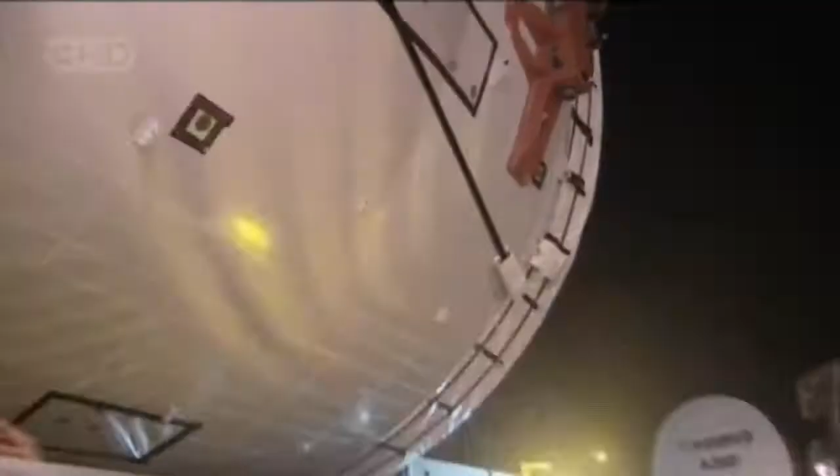Next, it's a handoff to a fleet of trucks and their escorts. Now it's a slow crawl, 16 kilometers per hour for the last 250 kilometers of the journey. You cannot leave these trucks alone. So you have some trucks for... It's very, very strange. People are very, very interested in that and very pleased. It's like a show, a permanent show, paid by Airbus. So far, this roadshow has had an exotic appeal. But will they still be clapping when convoys like this grind through town once a week? Ultimately, that's the pace Airbus will have to keep if they're to meet their manufacturing targets.

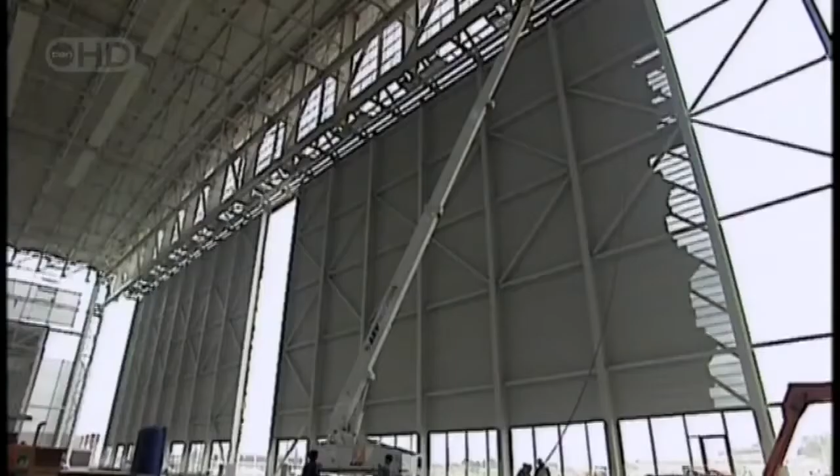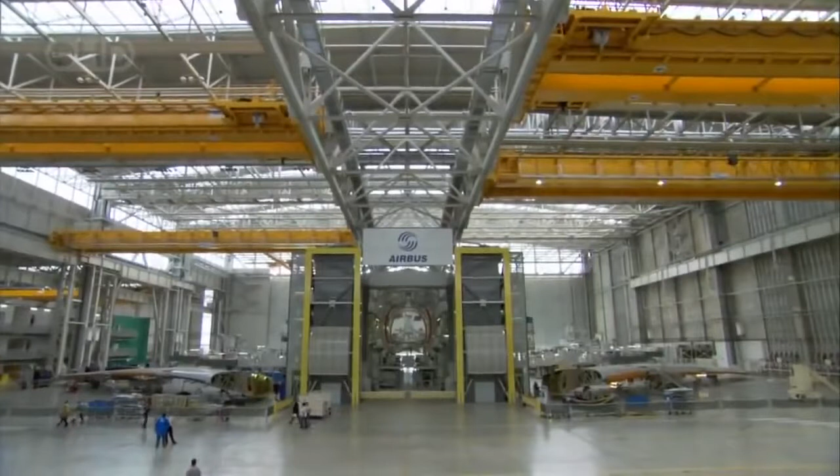At last, the convoy arrives at its destination, the final assembly line, the nerve center of the entire operation. The final assembly line sits on the edge of Toulouse's Blagnac Airport. As with all A380 factories, this one is huge. 500 meters long by 250 meters wide and 15 stories tall. 32,000 tons of steel, enough to build 3 Eiffel Towers. It's in here that the massive plane finally begins to take shape, with the help of a gargantuan assembly structure known as a jig. According to Julien Pouillou, there's nothing else like it in the world. We're standing in front of the biggest jig that is used in the world to assemble an aircraft. This is the Station 40.

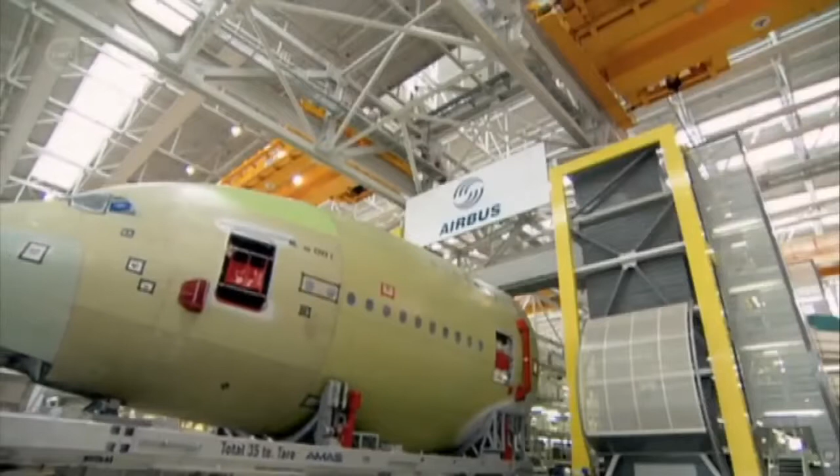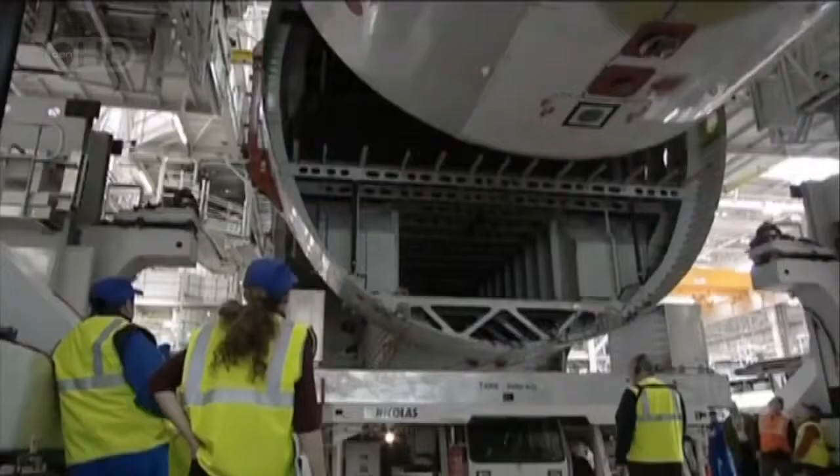Station 40 is where the fuselage, wings and tail all come together. The one-of-a-kind jig stands 5 stories tall, weighs 1,200 tons, and comes equipped with 4 elevators to carry workers to their stations. This is where theory becomes reality, as pieces made all over the world finally come together. If there's been any error, if the pieces don't measure up to spec, or if the joints don't come together just right, within millimeters, the huge passenger craft won't be fit for flying. The lives of future passengers depend on the steady hands of these craftspeople and engineers, working inside the mighty Station 40.

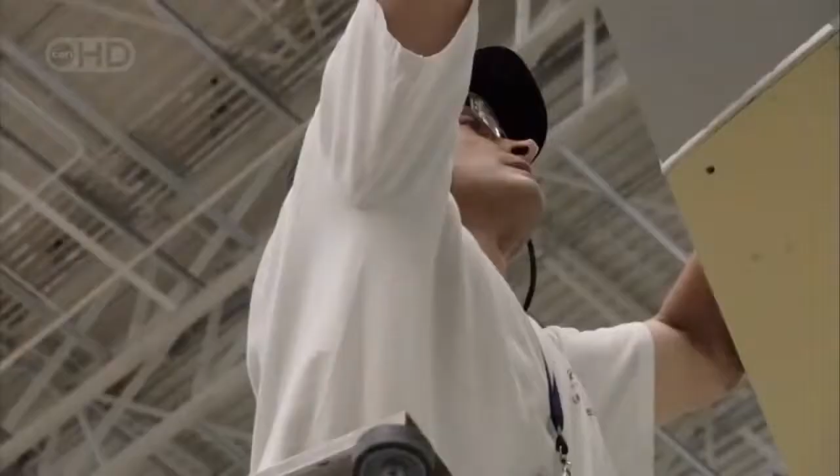The challenge is for us to assemble those pieces together at the same time, because we have a lot of workers working in the same area at the same time, and they have to do all sorts of completely different tasks. One has to take care of the wings and one has to take care of the fuselage, and so they are not doing the same job, but they have to do it together. Work on this plane now proceeds at an intense pace. It'll take 4 weeks to complete the assembly.

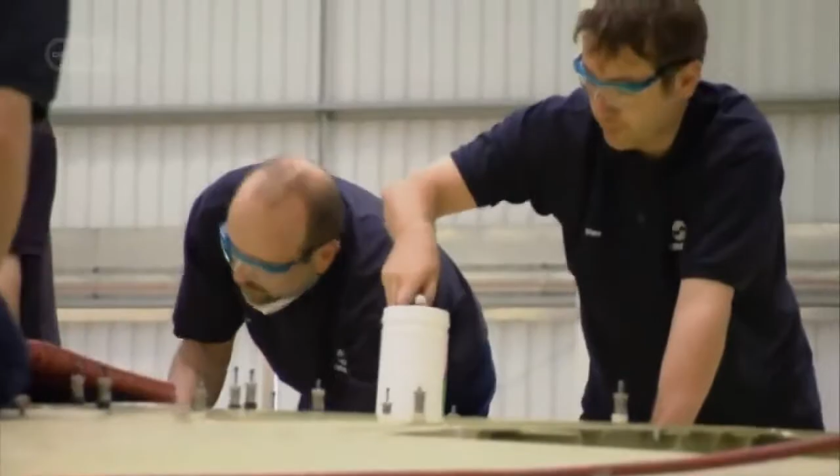Once the plane has been released from Station 40, it moves through a pair of 100-meter wide sliding doors and makes its way to the systems hall. Inside this gigantic space, 3 A380s can sit side by side comfortably, while technicians swarm over the superstructure, testing the electrical, hydraulic and plumbing systems that'll bring the dormant aircraft to life.

Building just one A380 is a massive job, but for Airbus to survive, they're going to have to speed up production to a breakneck pace. Eventually, the Station 40 team will have to crank out a defect-free plane every week. But before that can happen, the plane must be proven airworthy. Now all eyes are on the skies over southern France, as the gathered crowd wonders, will the A380 survive its maiden flight?

At Blagnac Airport in Toulouse, 40,000 people anxiously scan the skies, searching for some sign of the A380. All flights in and out of the airport are put on hold. The skies over Toulouse are eerily quiet. Nearly 4 hours have passed since takeoff. If all goes as planned, the huge airliner should swing into view at any moment. But if there's a problem, the flight crew will quickly discover how well their training has prepared them for disaster.

Much of that training took place using powerful computers, programmed to mimic the behavior of the A380. That's the theory anyway. In a simulator like this one, with a computational engine 500 times more powerful than a home video game console, photorealistic visuals help pilots to get a feel for the plane. Despite the A380's unprecedented size, Airbus engineers have tried to make it fly like any other airliner. 100 knots. The task of testing the verisimilitude of the simulator experience rests on the shoulders of pilot Claude Holvec.

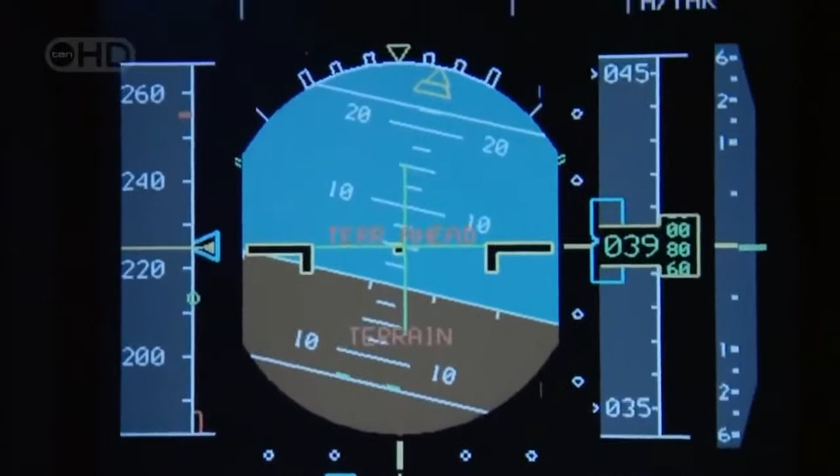It would take a lot more than an engine failure to knock this monster out of the sky. But test engineers are nothing if not imaginative, and they've loaded their simulators with more than 400 different catastrophe scenarios. Everything from a fire in the cargo hold to a devastating lightning strike. The exercises are useful, but no computer can simulate the awesome responsibility of shepherding 550 passengers through the stratosphere. The challenge is to fly with many passengers. I think this is the greatest challenge, yes.

Outside, all eyes are on the sky. The wait is excruciating. Then, a glint of reflected light. At last, the mega-plane sails into view. Eager reporters and photographers race to the edge of the tarmac to record this historic moment. A showy flyby excites the crowd. Makes a steep turn, lines up with the runway, begins final descent. Then, at long last, touchdown.

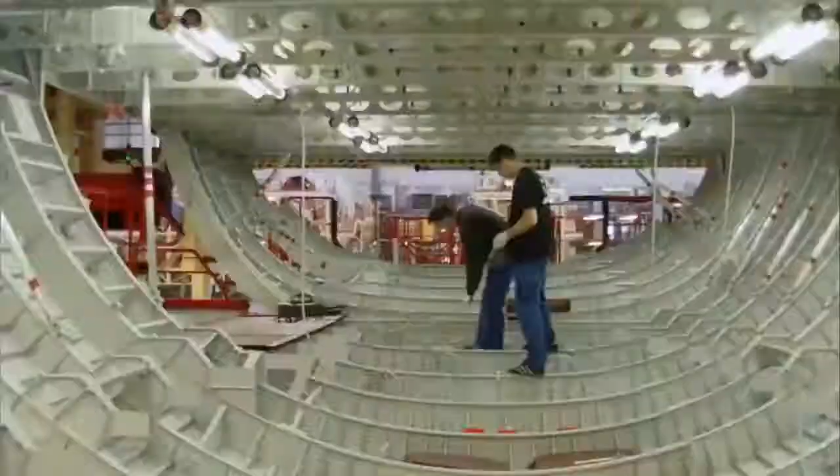They've proven that the plane can fly, but that may have been the easy part. At the time of the test flight, Airbus had 154 orders and still needed 96 more just to break even. To fill those orders, they must dramatically increase the speed of production and convince the world's airlines to pay nearly $300 million for each plane. But even while potential customers were lining up to drool over decor, and the engineering team was still basking in the afterglow of the successful first flight, Airbus surprised the industry when it unexpectedly announced a 6-month delay in the delivery of the first aircraft.

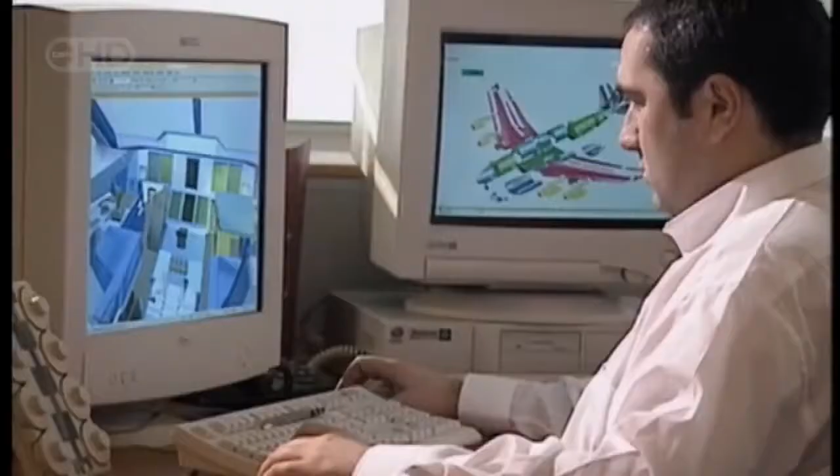Early customers who took the risk and put down deposits before the first plane had ever been built are not happy. Some analysts believe the plane is still heavier than Airbus promised, but Airbus insists that the delay is merely routine. The real achievement will be when the customer says, "Great, this is what I expected, I love it, give me more." If the last 40 years in the history of aviation is any guide, and more people fly further and more often, year after year, then Charles Champion's daring bet may well pay off, and the A380 just might become the flagship of commercial aviation well into the 21st century.